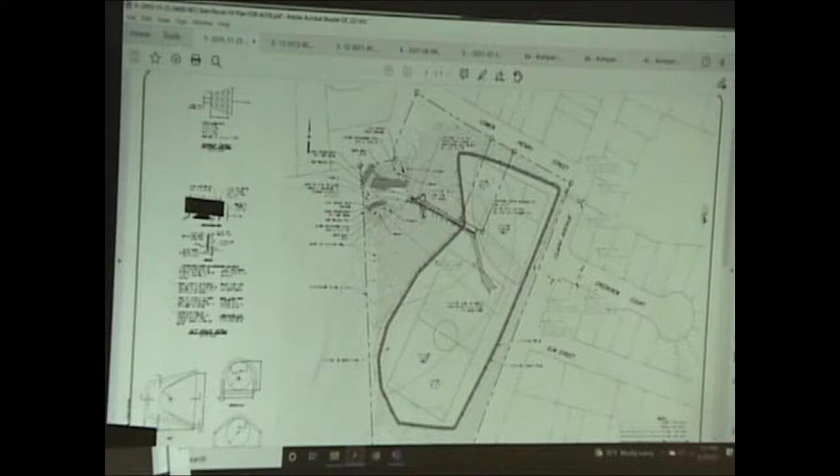The next drawing is now that the construction for the utility improvements is done, that's no longer a contractor yard. We needed to understand the topography of the existing parcels so we could have a base map for design for what was being thought of for the Bain Park.

On the right side of the drawing, this area is the Bain Park parcel. It's actually two parcels - there's a little rectangle that's a separate deeded parcel, and then this is the larger Bain parcel. And this here is the DPW yard. We surveyed the upper levels of the DPW yard just to get an understanding of the soil piles and the communication between this parcel and this parcel. This drawing was then able to be used as a base map.

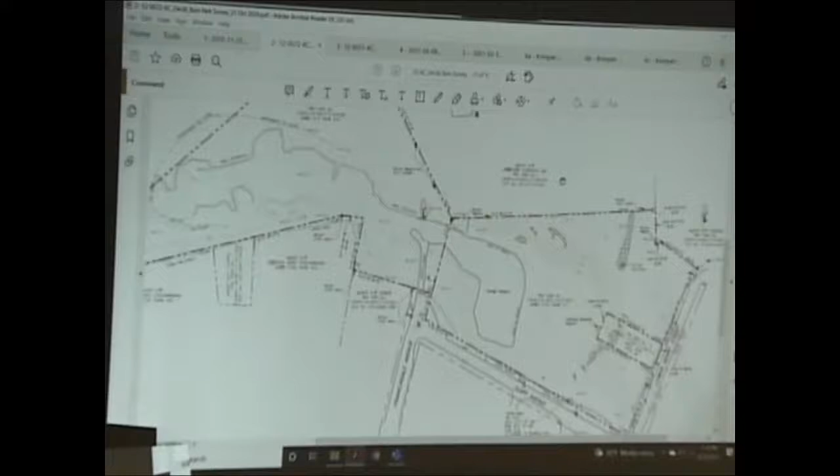The next drawing - at the same time when we were doing the survey for those two parcels, we looked at this here, on the lower part just below the yard. When we were doing contract 4 for the utility improvements, there was a sewer that was crushed. From television inspection, we knew that there was a problem with that sewer and we wanted to replace it.

We got agreement from the owner of Creekside Commons to put those manholes closer to the property line and even over the property line. There was already an existing easement, water line and recreational easement in Creekside Commons, and we've added sanitary sewer there. I included this map in the drawings.

This shows you this corner here actually gets you to Bain Park. So when we show you the master plan, you'll see how there's an opportunity to have pedestrian connection, if you so choose, to this location.

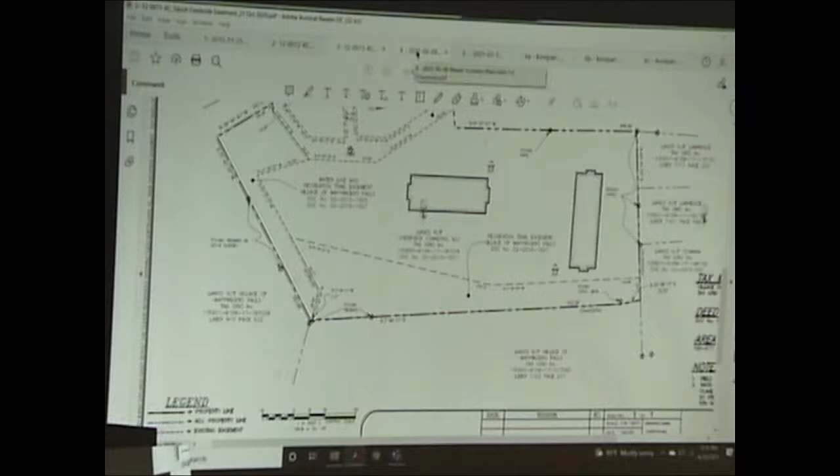Next up, we have the Bain Park conceptual master plan drawings. This is the overall master plan drawing. There had been meetings with the village's Bain Park committee where we discussed desires that the committee had for the use of this property.

The first thing we did is we pulled in a representative, conservatively large-sized multi-use field just for dimension lines - 360 feet by 150. You can see that pretty easily on that flat area with just a little bit of regrading, you can have a grass area that will support a lot of play.

It's not going to be a field quality competition soccer field or anything, but it'll be a grass area where you could have pickup games. Around that, we have a meandering path throughout the property. This is the top of the ridge that exists there, and then you get the slope down to Creekside Commons.

Over here, if you've walked around that site, you know there's a storm drainage manhole that is sitting on a plateau where we're calling to add some sections to it to bring it up. You can see from these numbers, we bring it up about 7 feet or so to realize this plan.

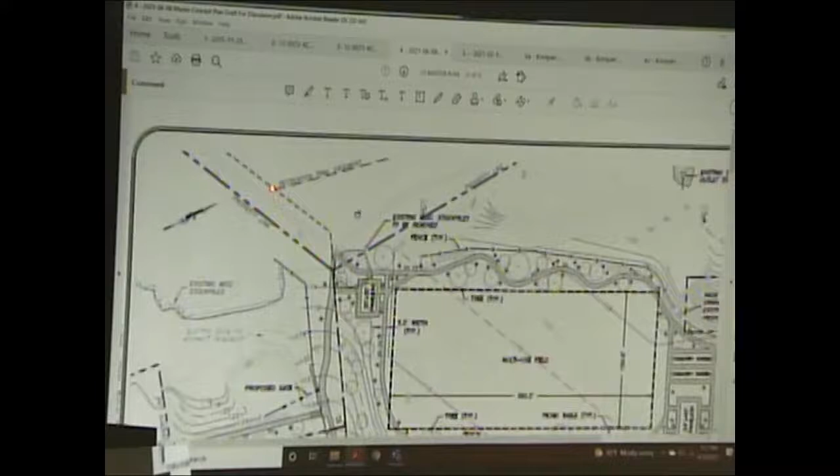In the corner, there's a playground area that's contemplated. There's a pavilion, some community garden areas. Over here, another possible pavilion, and then connection to that easement I just showed you. This brings you to Creekside Commons, and this connection here brings you to Leewood Arms.

So this is the overall plan.

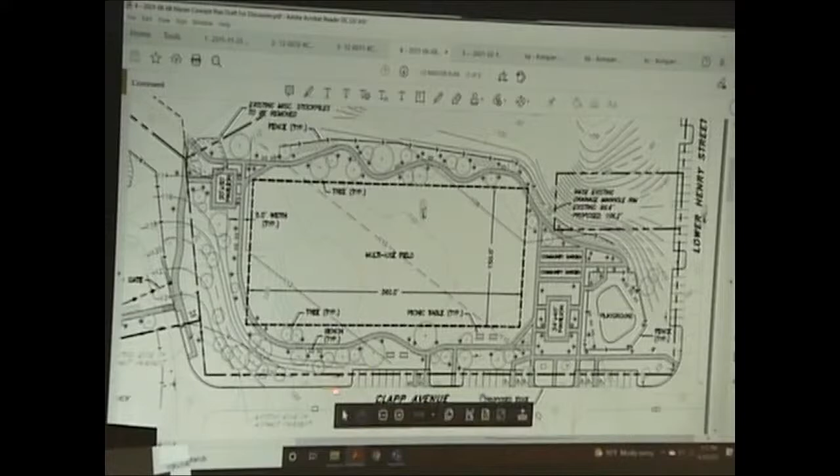Going up again, on Clapp Avenue we also have a row of parking proposed. Right now there's some very unofficial gravel-type parking, and we're looking to create, eventually, when the village has the funds to do it, more paved parking.

That paved parking would be painted with dedicated accessible spots and walkways. Along Lower Henry Street, there's also a bank of parking that would be paved. We wouldn't have curb there; we'd keep with the natural slope of the ground for drainage. We don't show a path from this parking because you can see the contours—it's a bit of a hill to get up there. A strong, able-bodied person would probably choose to walk up the hill by the shortest path, but we didn't propose a path there because it wouldn't be ADA.

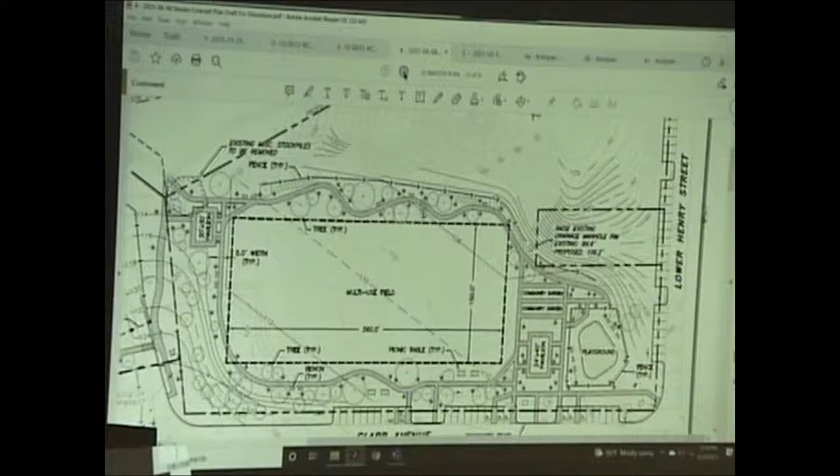In this area, we were looking for ADA paths. Now we'll focus in on the northeast corner detail plan.

This area is a play yard, which we'll describe in a very zoomed-in way as the presentation goes on. Kompan is a play equipment specialist that the village has actually purchased play equipment from—there are 3 pieces of equipment. We've had some initial discussions with them about design coordination and their layout, and we imported it into our drawing. We proposed this as a fenced-in area so there's some corralling of children playing, so to speak.

We have pathways in and out of the play area, and this is the community garden area we had spoken about, with good connections to a pavilion when the village is able to build that. For perspective, this is the existing stone that has the Bain Park sign on it already.

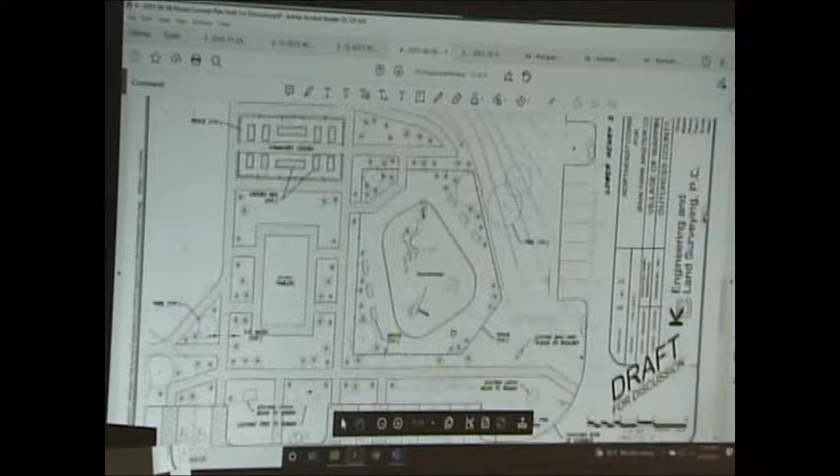In this plan we show the grading and some proposed trees. We haven't called out the vegetation—in the future, the village would probably do a specific planting plan.

The next sheet, we wanted to focus in and speak about that connection to Leawood Arms. The project committee had talked about a desire to have connection for that neighborhood—quite a few people live there. We discovered that we could have a pretty gradual walkway down across the existing entrance road to the DPW yard.

Currently there's a fence like this that is in some difficult condition. We're proposing to remove that fence when the village is ready to do so, and install a new fence and a new gate.

The gate is here. This is the existing path in—we're not proposing to change that at all. This is where the asphalt kind of crumbles and ends there; that would remain as is on the DPW yard.

This mound here, see this shape? That means mound in the contours. We're told from village history that this area is where there was an incinerator when the DPW yard was a landfill before the 1970s. When that landfill was closed, there was an incinerator in this location. We're intentionally not cutting any of the grades there—we are not changing the grades, and we're proposing a fence so we can corral the uses of the DPW yard separate from the uses of the park.

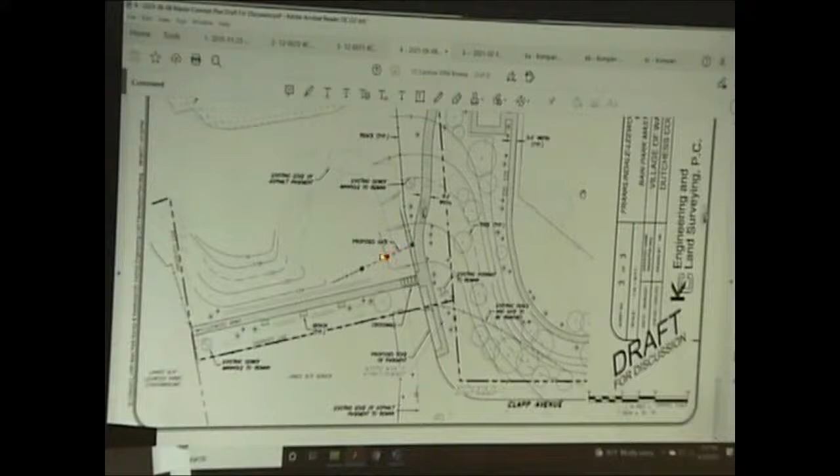The next sheet is the play yard I showed you on that northeast corner. This is a blow-up of that plan, and there are 3 pieces of equipment. This drawing is by Kompan, and Kompan is very specialized at understanding things like fall zone and accessibility for play equipment—very focused things that I and KC are not specialized at. Kompan knows that stuff.

So we have these 3 pieces of equipment, and another important bit of coordination we worked through is this detail showing the ground treatment below the equipment. It shows the gravel and wear course, then a rubber layer installed around the rubber mat. There will be a concrete curb, which protects against the mower so the grass area outside the curb doesn't hit the expensive rubber—it's instead stopped by the concrete. This was coordination information we got from talking with Kompan.

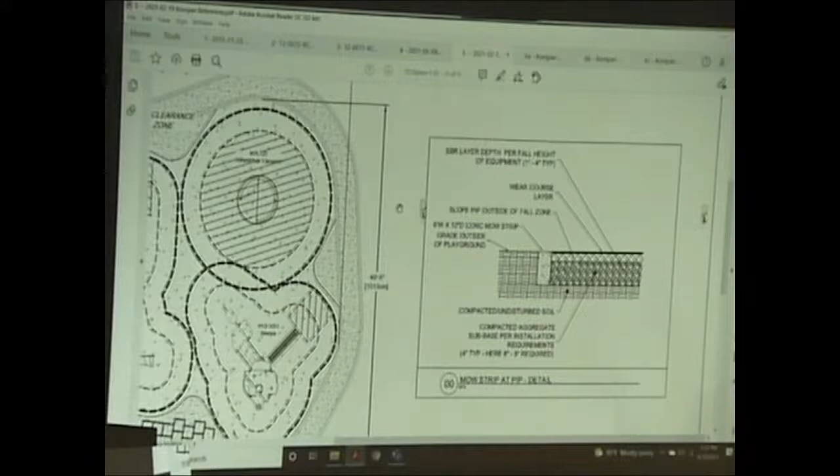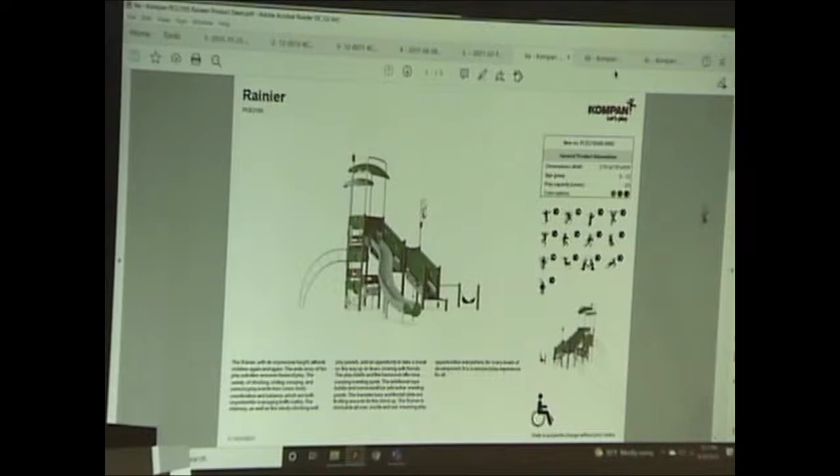The next bit of the presentation, Cindy Latino is going to take over for a few minutes. She's going to specifically talk about those 3 pieces of equipment. These are the product sheets available online from Kompan. There's an awful lot of information there, but we left it all in the presentation. Cindy can go through it as quickly or as briefly as she chooses. Okay, I'm just going to flip those signs over.

Okay, the one on the—oh, this one works here? Okay, so to begin with, I'm going to give you a little background history on Bain Park.

Bain Park has been on the board for many, many years. The committee that finalized this plan started meeting around 2011 to come up with a concept that would enable us to take this large parcel of land and put it into phases so we could develop it over time, knowing that in order to develop it we'd probably have to go after grants. By doing it in different phases, we could have the flexibility of going after larger grants, but also some smaller ones where we could put specialized areas into different parts of the park.

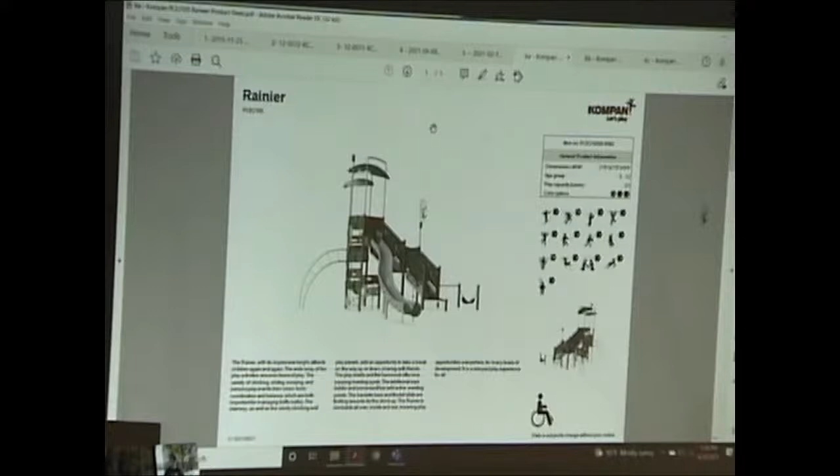The playground itself is an inclusive playground. It is not a handicap playground, and it's not what we'd call a regular playground. It's inclusive, meaning the equipment is somewhat tailored to adapt to lots of people's needs, but not specifically handicapped. I wanted to make that clear because there seemed to be some confusion over that as we were moving ahead with the design.

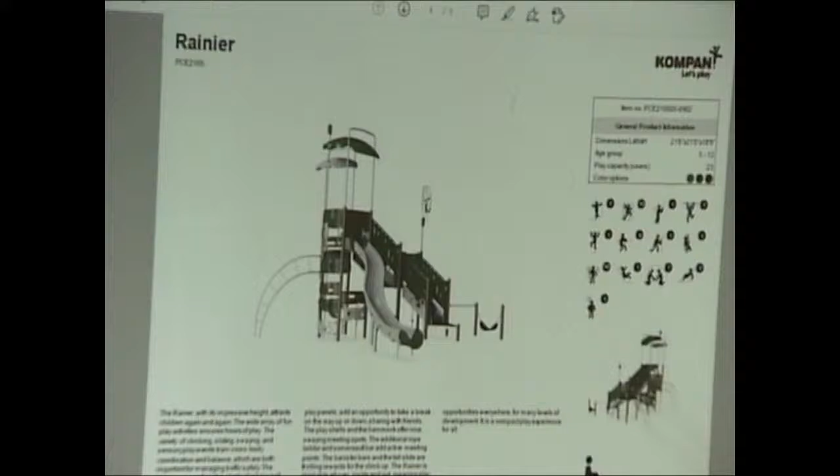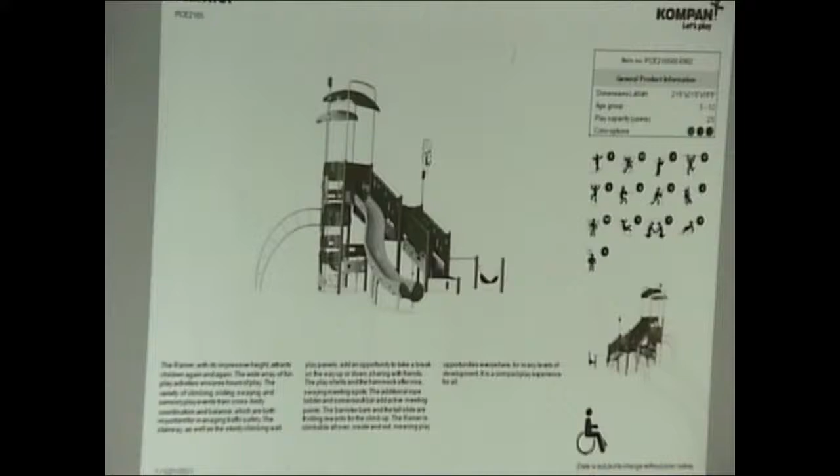The feedback we were getting from people with handicapped children, mostly those with accessibility issues like being in a wheelchair or having mobility issues, was that they'd prefer to see some type of apparatus put into the park that would allow them a better way to function and have fun on equipment. So with that in mind, we switched out that water feature, which was basically troughs where kids would get water on it, but the water would just naturally drain into the ground—we weren't going to recycle it or anything. We replaced that piece of equipment with a carousel.

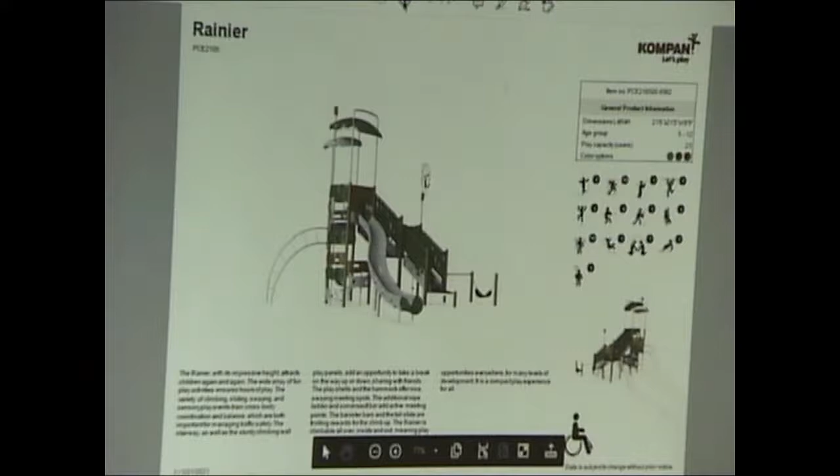Now I'm going to take you through each piece of equipment. This initial piece, the Rainier, is specifically for an age range of 5 to 12. It's got some challenging elements, and it does have some inclusive elements. You'll see in the lower portion it looks almost like a hammock on one end—that's a feature.

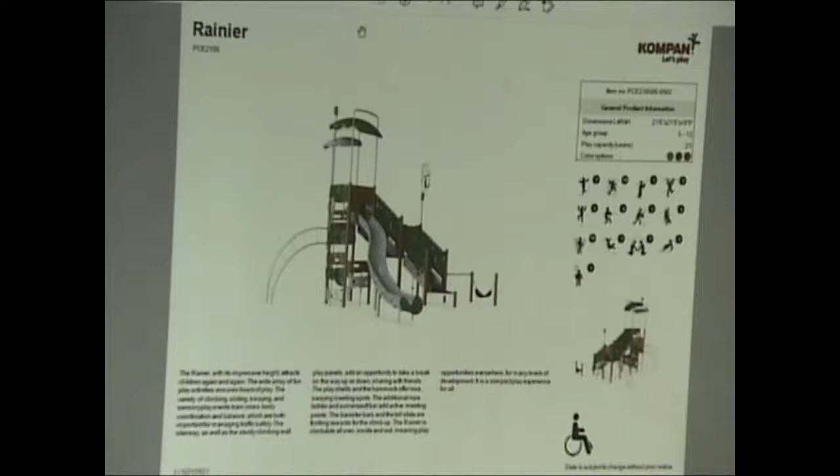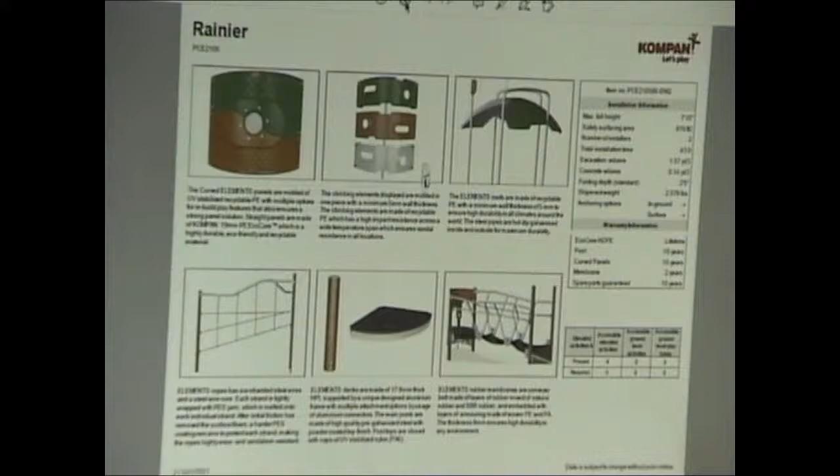There are some other things you can't necessarily see from the pictures, but we'll have available to you all the specs online that talk about the various parts of the equipment that allow for handicapped accessibility, as well as that inclusive concept we were looking for, so that all kids can join together and play in one area. Linda, you can go on to the next one too—that's still the same one.

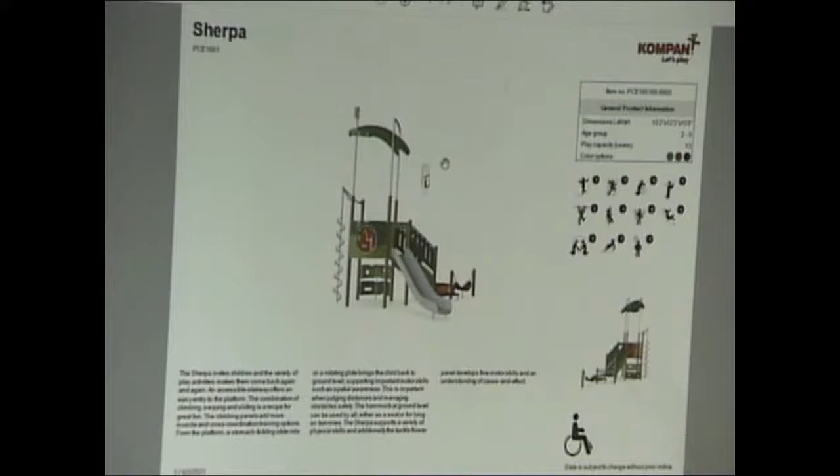That's the 5 to 12-year age range. This Sherpa is specifically designed for a 2 to 5-year age range. We're trying to capture that larger age range, making sure we had equipment on site that addressed the needs of younger kids as well as older kids and provided some challenging elements.

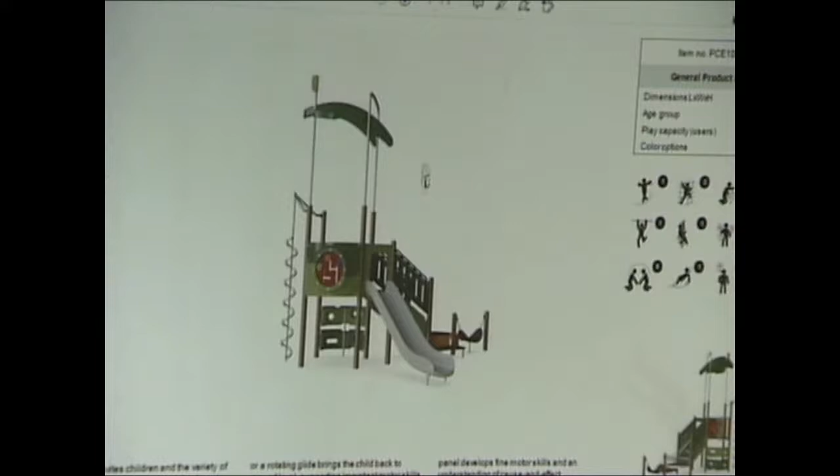This is a similar type of thing, with some similar activities kids can do, but on a smaller scale that addresses the toddler to preschool group. For preschool kids who are more advanced in their physical capabilities and motor skills, the larger piece of equipment would be something they'd be challenged by and would be able to use as well.

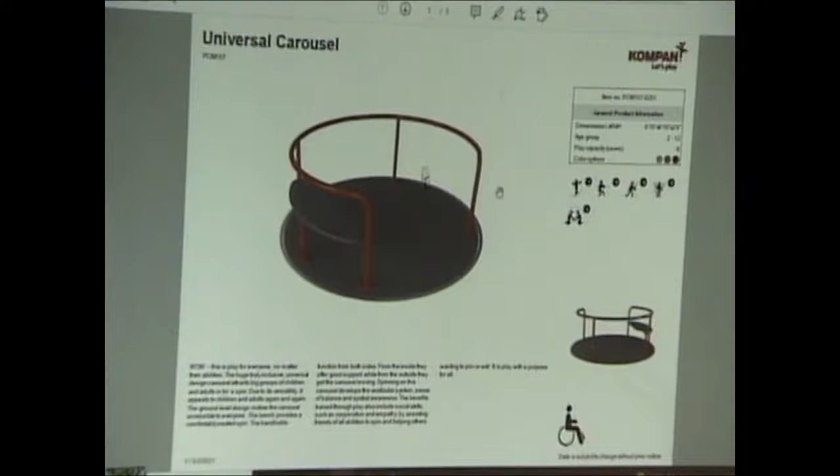This is the carousel I was talking about. We replaced it where we had that water feature. The carousel basically allows both kids in wheelchairs and kids who are not, who are functioning regularly, to get on, and it spins. We felt this was a compromise in terms of the questions we were getting from parents with kids with disabilities, and felt it fit into the scheme well.

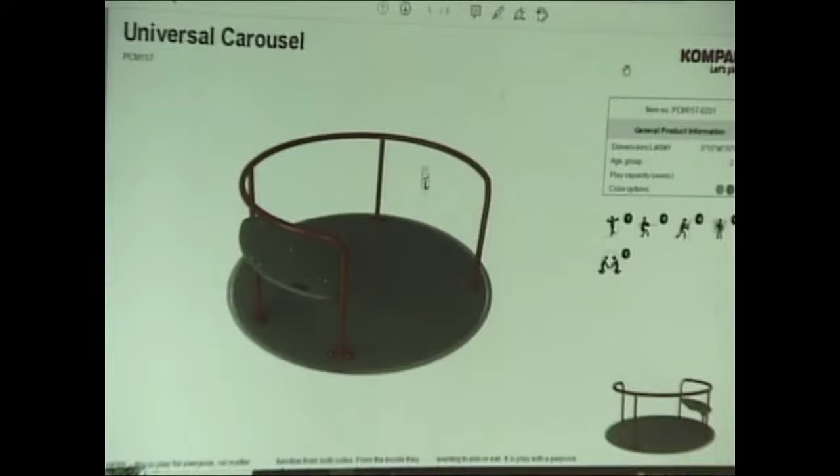I want to backtrack and talk about the area of the playground. Although it looks very large, to some degree, when you consider the fall zones required for the various groups, you'll see what Kompan did for us: we looked at how to cover those fall zones with the specialized poured rubberized playground surfacing and get the most bang for our buck. I was looking to pour as little as we possibly could, so in some places they overlapped it so we didn't have to make as big a pour.

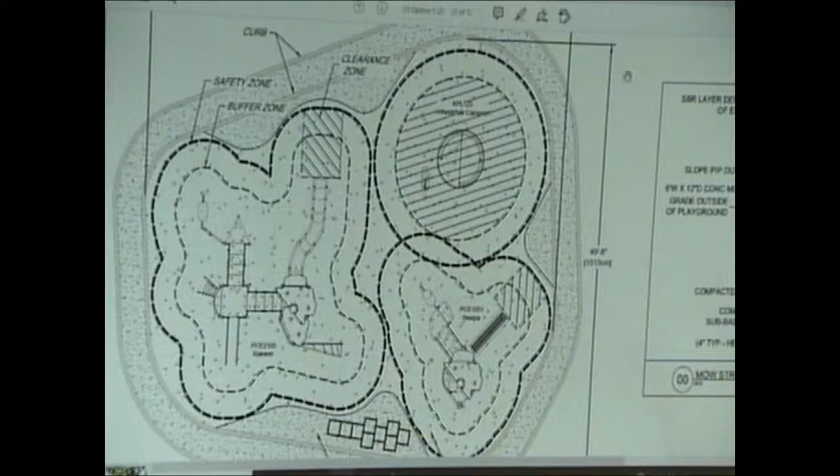The playground also has lots of other areas where we'll be able to slip in additional equipment of a more inclusive nature for kids with disabilities, things like musical instruments. One of the community garden features we were looking at putting into another area of the playground would be something like a butterfly garden, capturing the idea of science projects and things kids could take advantage of.

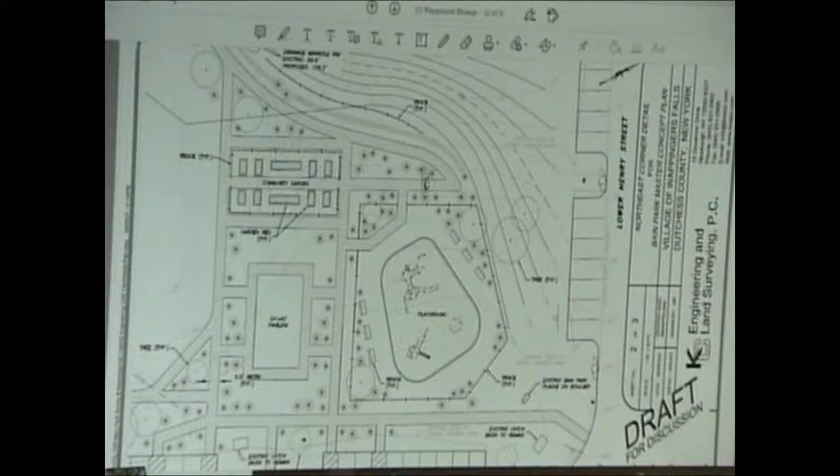Going around other areas of the park, we tried to capture areas where we could insert something like a swing without necessarily having to worry about fall zones. You'll see areas with picnic tables and benches, and other areas where we might slide in something like an old-time porch swing that several people could use at once. It gives the same sense of swinging motion and relaxing enjoyment, but we didn't have to worry about fall zones or the padding underneath that would be required for a large swing set.

I think that pretty much takes you through what we're planning on doing. This has always been a project we viewed as a phased project, so going forward we'd try to add things as we could. I also put in adult exercise equipment at the Bain Park Playground that we envision placing around the multi-purpose field, expanding the use of the park across age ranges, from birth right up through our senior citizen population, trying to find something for everybody.

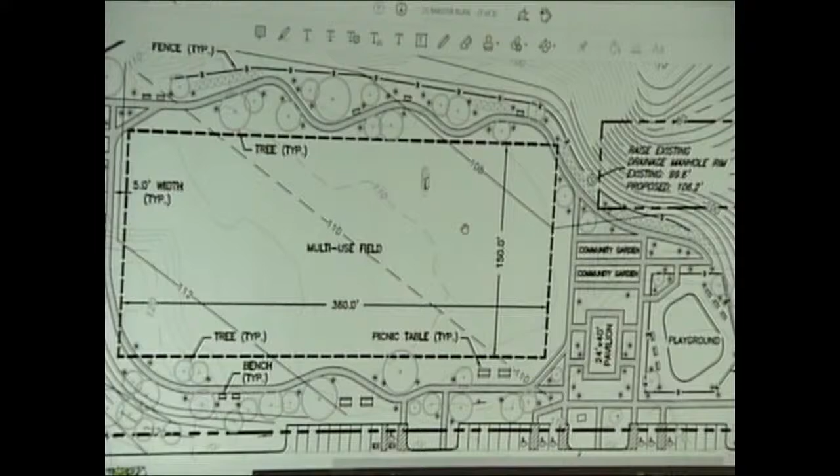I have a copy here that I took from the original plan, I blew it up pretty big. It shows you where Clap Avenue is and Lower Henry. The only thing I have concerns about in the whole thing is you're going to have things for kids, a sandbox and garden and so on.

I don't know whether you know this, but around my neighborhood we have a lot of woodchucks and a lot of stray cats. Play boxes and sandboxes, that's what cats go for. I can't even have a garden in my own yard, and I have 3 stray cats I feed all the time. But that's the only thing I see, really.

Now, the other question I had is, how many trees are we gonna have in here? Honestly, I don't know, it depends on what we have money for and where we are with stuff. This plan must cost a good buck to make this up, right?

What would this plan cost, and do you have an estimate for putting this playground in? I think our projection was around 120,000. We got money for the playground, we got money for this, but the whole park itself over time will be in the millions. If we were gonna do that whole park right now, it would probably cost about $2 to $3 million. So that was why we decided to go with a phased project.

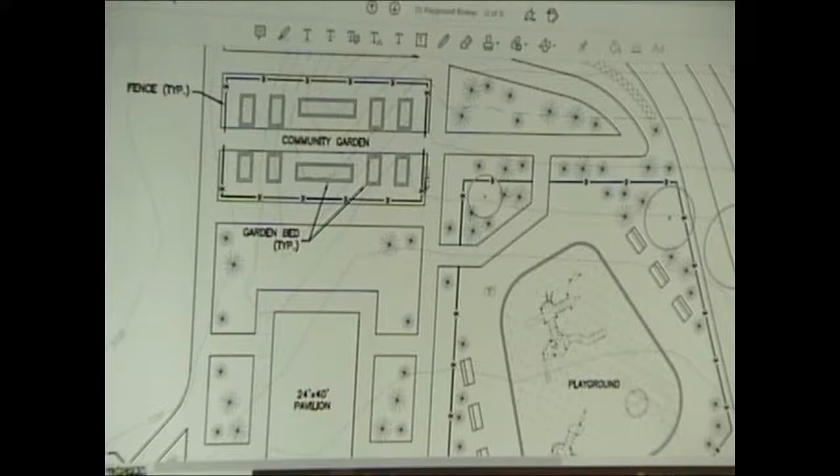So let me go back to the gardens and talk a little bit about those. What we're looking to create is raised planter beds, so they would be higher. And they would be things like a butterfly garden, mostly flowers, perennials that we were putting in there. I think you can see the detail for the fence around it.

That's an older plan, yeah. But there is a fence around the outside of this community garden area, so that we would be able to keep it contained and keep the animals out as best as we could.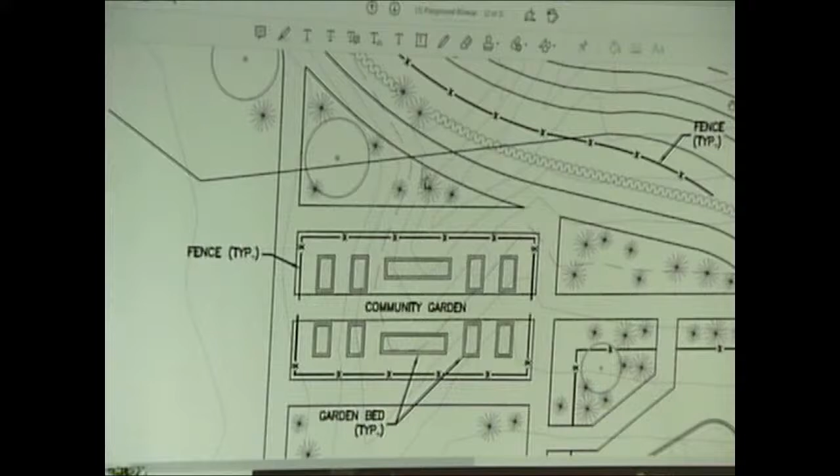We had the same issues down at Vets as well with animals coming. In fact, I took the backside of it, looking from Clapp Avenue over, it just goes, it just drops right off, you know? Is there gonna be any more fill put in there, or along Lower Henry Street, does that gotta be all cleaned up and filled in also? There's some minor grading to happen.

But we didn't call for doing any kind of development down there. There's only one drain that goes through that property, the one coming from Clapp Avenue, and that comes from up in the 3rd Ward, all the way down, it runs year round. Yeah, it's in place and it's in function.

But I just wonder what this is gonna cost, that's what I'm saying. Overall, if we were to do the whole project right now, it would cost $2 to $3 million. So that's why we chose to go with a phased project, that we felt we could, over time, expand and put different elements in by capturing smaller grants.

Because you're gonna need a fence around that outside perimeter all around there. I had a concept with this, he gave me some numbers that I couldn't believe, you know, going by this old plan. We knew it was gonna be expensive, and that's why we, but between you and me, this sounds like a good project. I bought stuff years ago, it's on Market Street, Falls View Park, you know.

There's something we really need in this village more than another playground. The fact that you had the burned out building - there was apartments there, stores, and so on. There's parking there too. I had this little plan one time, but they turned it down. You can probably put 25 cars along there and have a little park on the other end, overlook the falls. That's what I'd like to see.

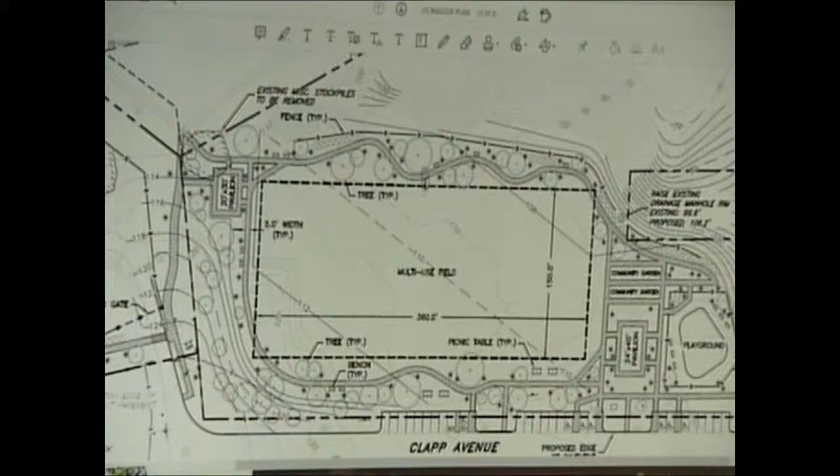So the next steps for this project involve Dutchess County Planning. They're currently reviewing the village's CDBG grant application for Bain Park. The announcement is expected soon. The village has been given questions about the plan - they wanted all of the project information. It looks as though they have been working through their own environmental review, which is NEPA, required for projects with federal funds. So that's good news - there's a chance that the village is going to receive a favorable announcement.

So we anticipate that the 2021 construction will mainly focus on that playground equipment area. The equipment's already been purchased, it's in storage in the village. And once the village gets the answer relative to the recent grant application, we expect that the village board will confirm the limits of the site work improvements to be included in the 2021 construction based on that available funding.

For instance, will the village choose to build parking along the corner to provide service for the playground area? We would work with the village looking at the funding that was achieved and what the costs of various improvements on that corner would be.

The concept plan is expecting that the village will do this work in phases as funding is achieved. The village has a long history of doing that creatively. I even think there could be some Eagle Scout projects in there with the community gardens and building garden boxes, just as an example. I think of the village's park down near the boathouse, which has been expanded upon over years of effort as the village has gotten the ability to do so.

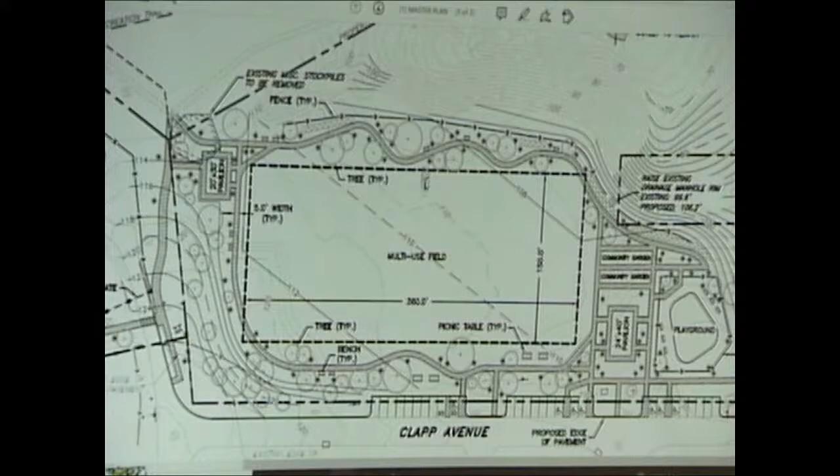So are there any questions or comments about the overall master plan? I know that the village wishes to get public comment into the plan, and that's why we're here.